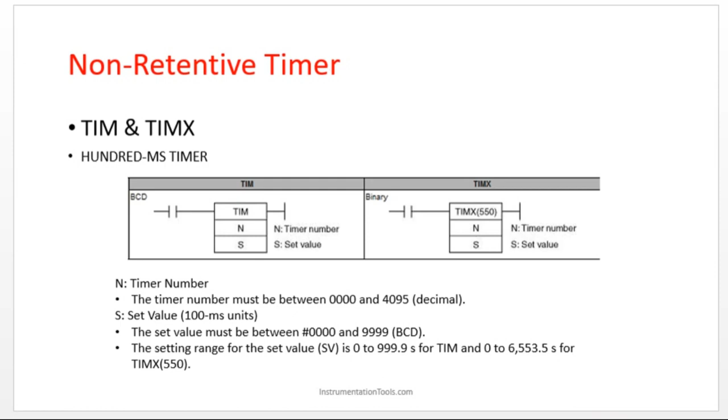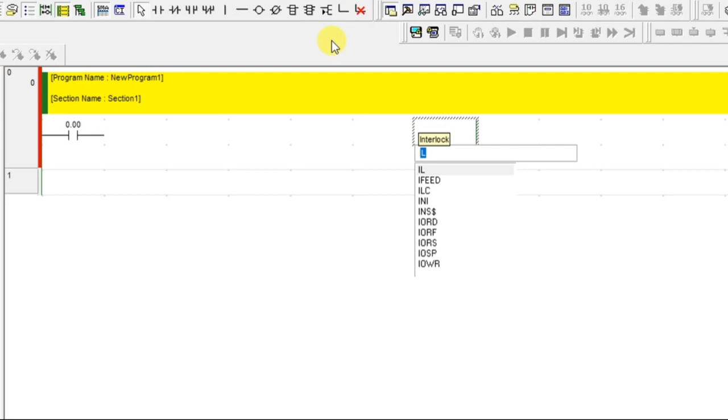So let's see how to use this timer in the CX Programmer. I have created a new project, and I'm going to get a contact and name it. Fine. So I'm going to just type I; I is the shortcut for instruction. If you want to get a new instruction, you can just click here and type I, or go here and choose the instruction. Go to detail, find instruction.

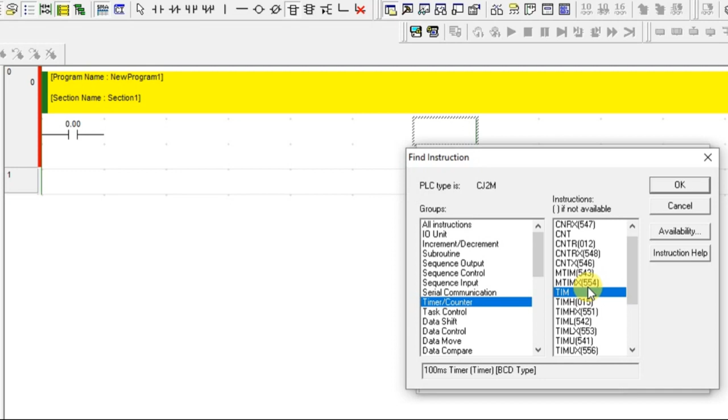There is a timer here. So in this, timers and counters are there. I'm going to use this TIM first. Once you use the TIM, you can see this is a 100 milliseconds timer, BCD type. So just choose this, and give the timer number. I'm just going to give 0 and go for OK. And now this is showing red color, right? So something has to be added. That's what it is showing, like an error.

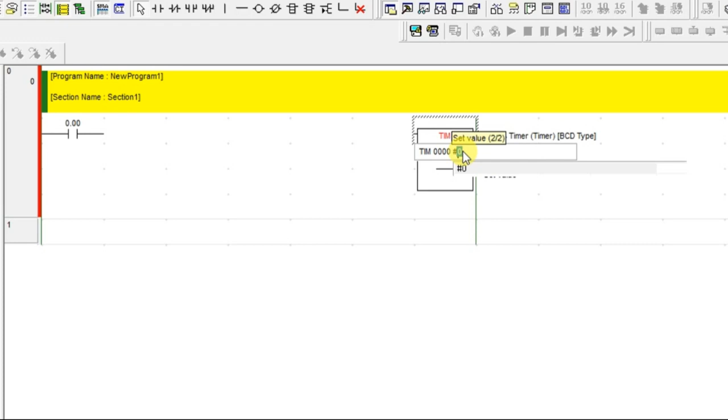So just go again, edit. In this edit, what do we have to give? We have to give the time delay, right? So I'm giving hash. Hash is the format to give the time duration, the time delay. So hash, I want to run this timer for 10 seconds. Since it is a 100 milliseconds timer, I'm going to give 100. So 100 into 100 milliseconds is 10 seconds. Just click OK. See, now that red color is gone, right?

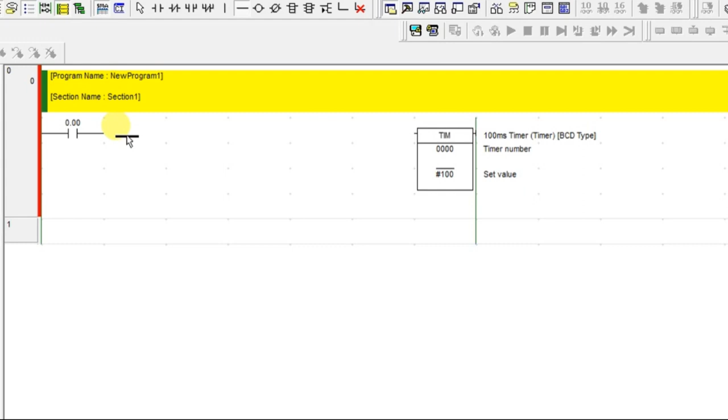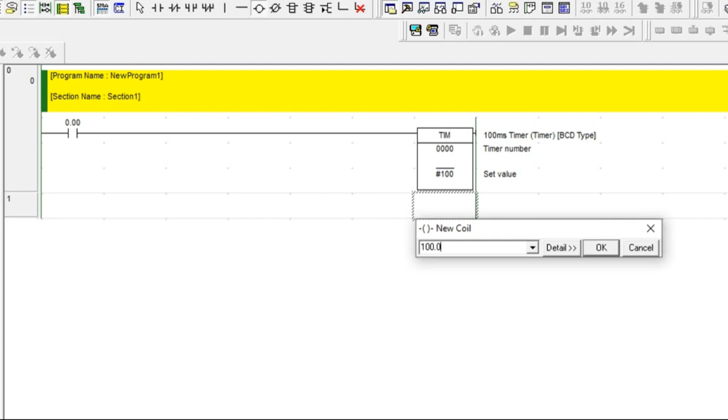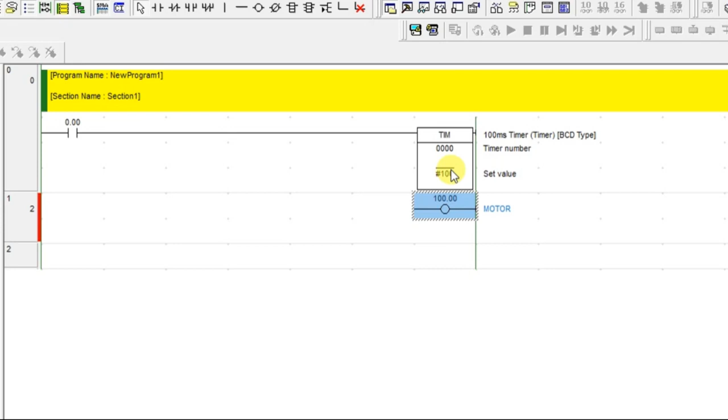So let's connect the contact and timer. And now I have to get the feedback of this timer, right? For example, you are going to turn on this output, a motor, after 10 seconds. This is the switch and this is the motor. So how am I going to take the feedback of this timer? You can make use of the contact itself. The contact name should be the timer name, T0. Just click and connect. Right, so that's it.

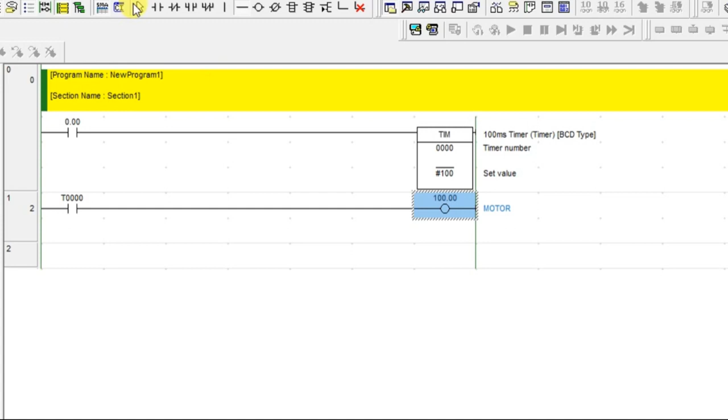So what will happen when you turn on the switch? It will take 10 seconds to turn on a motor. Right, so let's turn on the switch. Go for the simulation mode. So it is entering into the simulation mode.

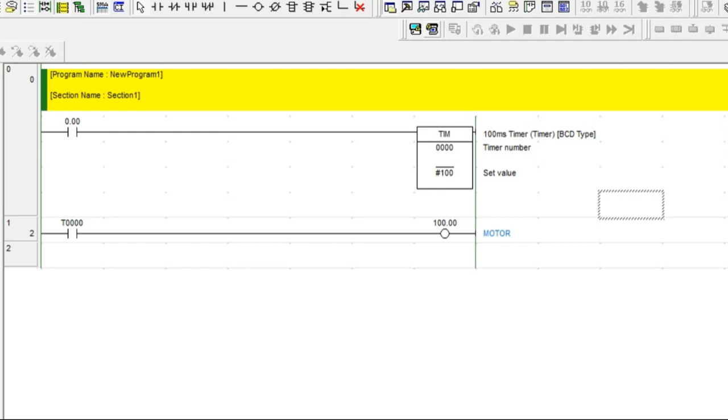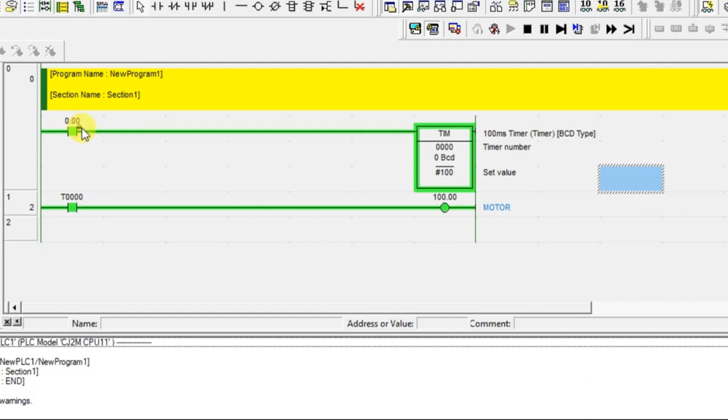So let's turn on the switch. So the timer started running. Can you see the timer is running over here? So after 10 seconds, the output is on. So when you turn off the switch, what will happen? Your timer is off, your output is also off.

Okay, so here the #100 is the set value, and this timer will be decrementing; from higher range to lower range it will run. So from 100 to 0 it will go. Okay, so it will count down from 10, 9, 8, 7 like that.

So I'll do it again. I'm going to turn on. See, it started running, it started counting down. So once it is reaching 0, motor will on. Got it? That's it.

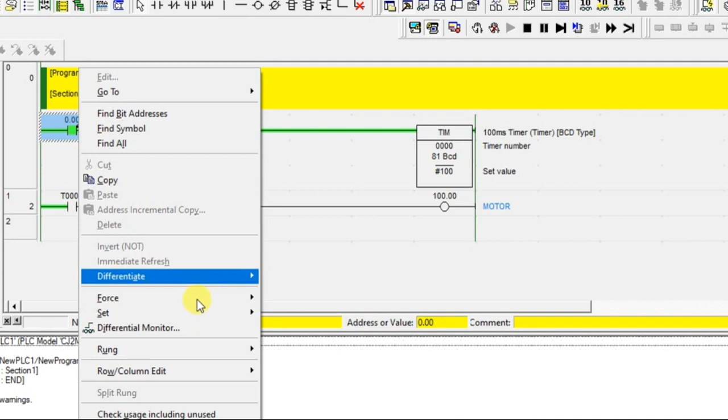So one more thing. What if I turn off the input in between? Let's see what will happen. It started running. So I'm going to turn off. Timer is off and it goes back to the previous value. So that's what is called a non-retentive timer.

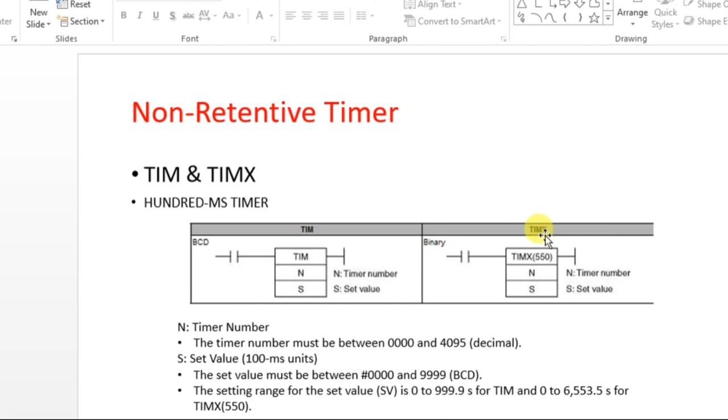So let's add one more type, which is this TIMX binary type. Let's see that also. So I'm going to have one more input here, 0.01, and let's take TIMX. If you know the short name of that, you can choose it, else go for this. Get help from this, no issues. You can go for TIMX. Where is it? Here it is.

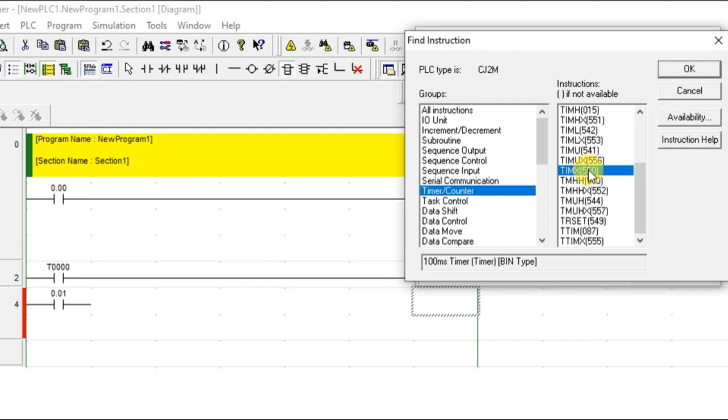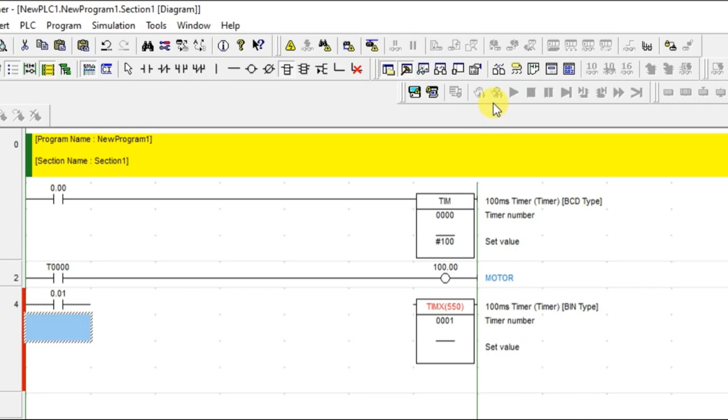So this X means it is a binary type timer. It looks and works the same, but how the value is taken is different. So let's set this also to 100. This is also a 100 milliseconds timer. You can see here, 100 milliseconds timer. And one thing is, there you used a hash, no? Here you have to use this & symbol. &100. That is the difference. The format of giving the set value is different.

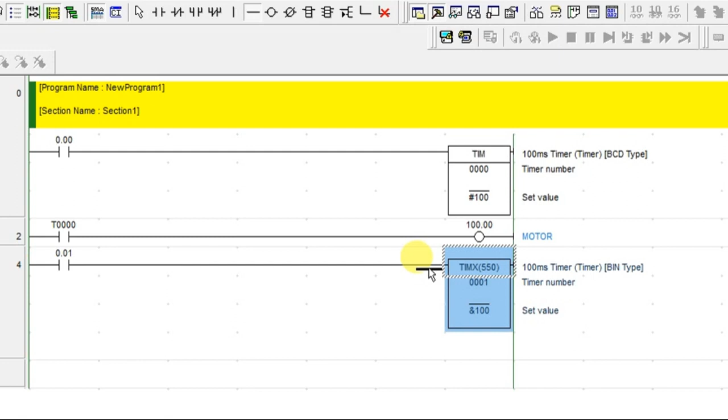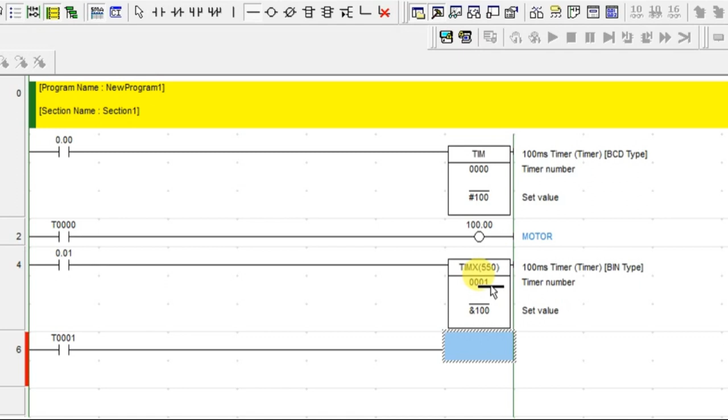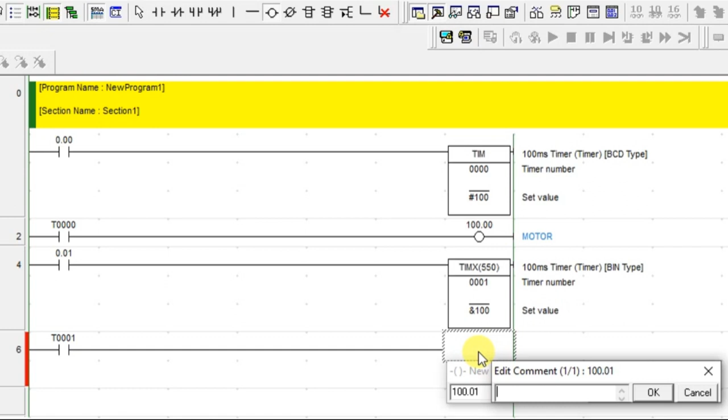Okay. Now let's connect. And you have to get the feedback for that, so it's the same. So I'm going to give T1. It's taking the timer contact. I need to give the same name as the timer. This is the timer number, and I'm giving the same timer number here. Let's take one more new output and name that output as another motor 1. Okay, let's go for the online simulation.

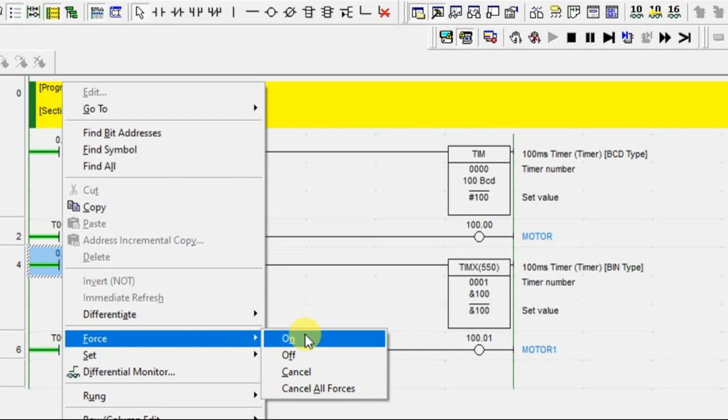So look, here also the value is changed to 100. So let's turn on this. So it started counting. So after 10 seconds, automatically it turns on.

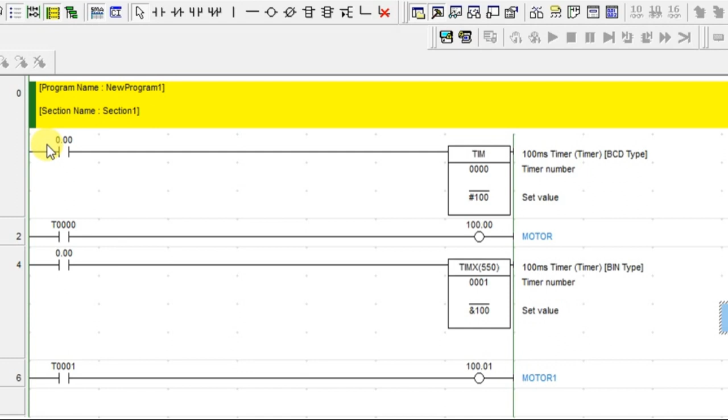Alright. So let's make this input the same as this input, so that you can see both the timers in on condition. So I'm going to delete this. Right. So both are having the same input. You see both the timers will turn on, and at the same time it will turn on both the motors. So this is a 100 millisecond timer.

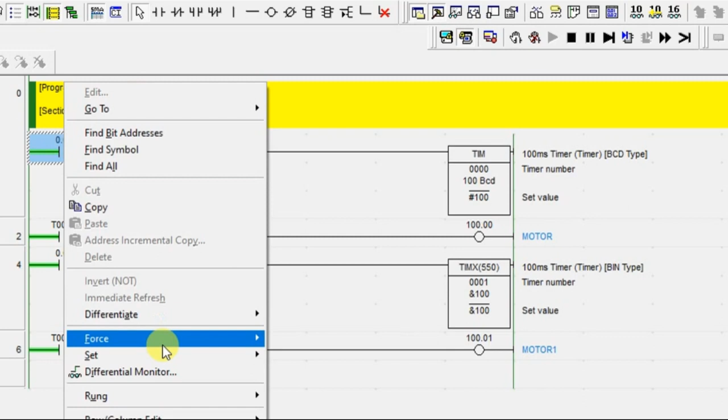So I'm going to turn on this. Yeah, it started running. So you can see this is off, this is off. After 10 seconds, this will be on, this will be on. That's it. So both the motors are on. So this is the non-retentive type timer, and it has the 100 milliseconds time delay duration.

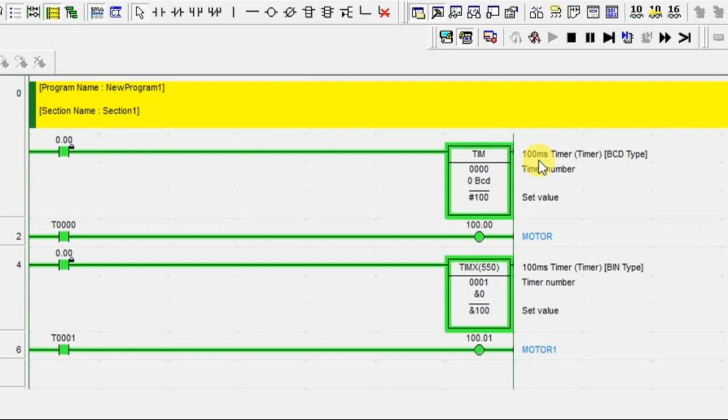So for the number of seconds, you have to calculate the set value and give it. For 10 seconds, I'm giving 100 here. Like that you have to calculate. So 100 into 100 milliseconds is 10 seconds. So that's it guys. I hope you have understood these two timer types. I'll meet you in the next session with another two timer types in CX Programmer.